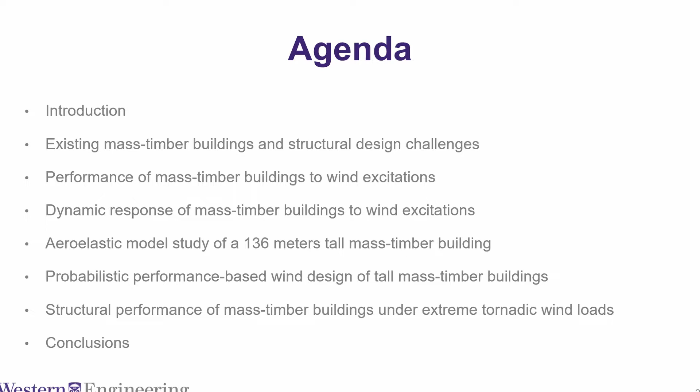We'll focus on the dynamic response. I will also introduce performance-based wind engineering design, the performance-based wind design approach. The majority of houses in North America are made of timber — not necessarily tall buildings, even mid-rise and low-rise buildings — and there's a chance they could be exposed to tornadoes. We have been working on that type of research too, and I will introduce some of the outcomes.

Why do we need wind studies? It's because the majority of our construction is along coastal lines and exposed to hurricanes. Even in the middle of the continent, construction is exposed to intense non-synoptic winds like tornadoes, downbursts, and other strong synoptic winds. We need to design for them, otherwise the kind of damage you see in this picture will happen.

From a tall building perspective, the majority of tall buildings are well engineered, so you may not see damage as significant as in their less-engineered low-rise counterparts. But there is another motivation: the economy.

When you try to design buildings with a blanket approach using building codes and standards, that may or may not accurately represent what you are designing. Chances are you could err towards conservatism. It's not always the case — sometimes you may not even be conservative — but the majority of the time, because we use an envelope approach, we tend to be conservative.

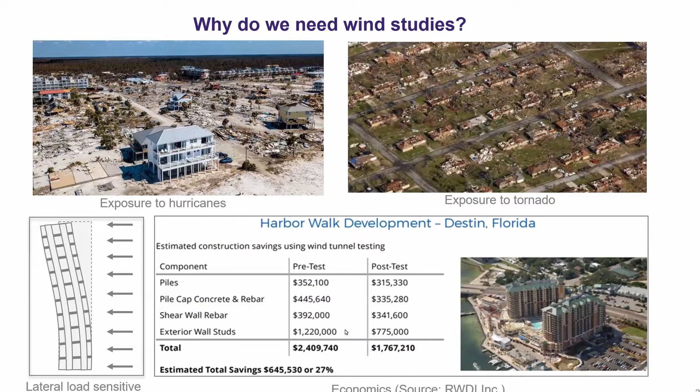For example, on a mid-rise tall building, there was a study done by RWDI. If you design using code versus wind-tunnel-based methods, you'll see savings in cost on this mid-rise type of building — 2.4 million versus 1.7 million. So you'll save about 27% of the cost. There is an economic incentive as well.

Western has a good tradition in wind research.

Sorry, I was closing the door.

Thanks to our former members, like Professor Davenport, who is considered the father of wind engineering, since he established the boundary layer wind tunnel in the early 1960s. Since then, Western has been a place to do wind research, primarily because we have a critical mass of highly experienced wind engineers, professors, research engineers, and more than 60 graduate students, most of them PhD students working on wind-related topics.

We are also blessed with state-of-the-art experimental facilities: boundary layer wind tunnels, a large-scale failure study lab, the Insurance Research Lab for Better Homes, and another lab for avian research, bird aerodynamics and biological aerodynamics.

More recently, during the last decade, we added a state-of-the-art facility, the WindEEE Dome, capable of generating tornadic and synoptic wind. In addition, we augment the experimental research heavily with computational research, using the facilities at the SharcNet supercomputing facility, the computational resources available in the Southern Ontario Smart Computing Innovation Platform, and the cluster we have at WindEEE as well.

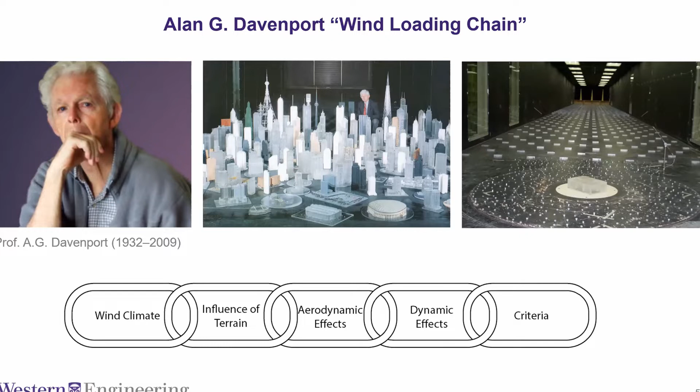It starts with the wind climate. The wind climate, first in the chain, primarily deals with quantifying the design wind speed, and what type of wind is happening in the particular place where we want to design the structure. Is it hurricane? Is it tornado? Is it downburst? What's the frequency?

This kind of information can be obtained, particularly for straight wind, from airports - we analyze the airport data. If the place is remote and there is no airport or measurement data, we rely on climate models. Majority of the time we target the design wind speed based on what the code says, but if there is no local code or if the code is too old, we rely on this kind of airport data.

Of course, in any system design, the outcome or response of the system is dependent on the input you provide. If the input is not correct, there is no way the output will be correct. So this is the most important step in the wind load chain.

Once we know for what intensity and type of wind we are designing, then we look into other parameters that affect the wind response. Wind is affected by whatever it sees - for example, the terrain, the surrounding buildings.

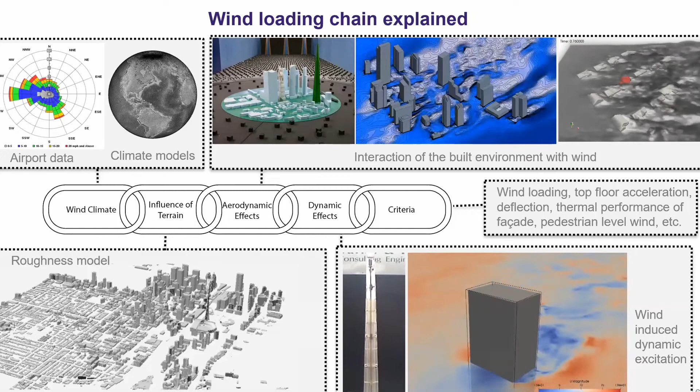If you have antennas, for example, this antenna is on top of a 350-meter tower building. When you have flexible antennas like that, with almost a 30-meter range, you have to study it separately because it's so flexible. You see the dynamic model in the wind tunnel behaves like this - you have buffeting movement, across-wind movement, and things like that. So this load would be different from the same structure if it was rigid.

That is what the dynamic effect emphasizes. If you consider all these parameters, most likely your wind load will be accurate, the deflection you calculate will be accurate, and the acceleration that you calculate from your model will be accurate.

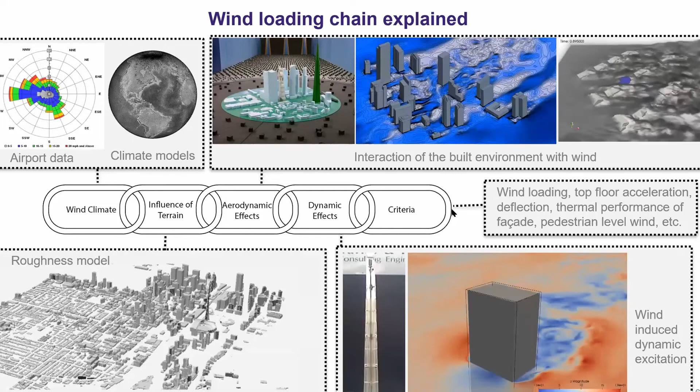Most of the discussion so far was based on straight wind, but as you know, even in South Ontario there is the Northern Tornadoes Project led by Professor Greg Kopp at Western, who chase tornadoes. They counted more than 29 tornadoes in South Ontario this year alone, and in the Midwest United States and North America more than 1,700 tornado landfalls.

So we have to design at least the essential facilities for tornadoes, like hospitals, police stations, fire stations, and at least we should have safe rooms for residentials. In order to do those kinds of designs, we have to determine the tornado load accurately.

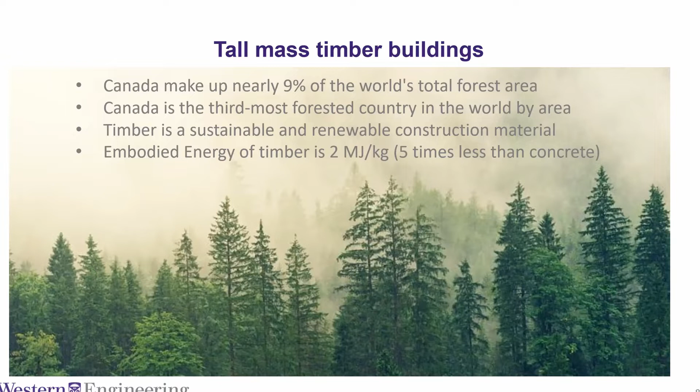With proper forest management, we can do this without affecting the forest - the forest needs to shed some of the old trees anyway. Just by utilizing those kinds of trees, we could build many houses out of timber.

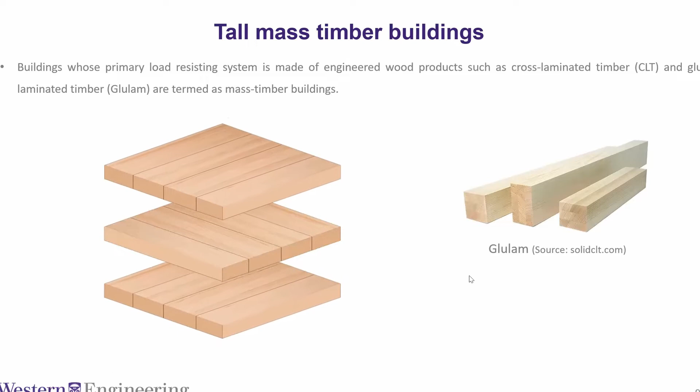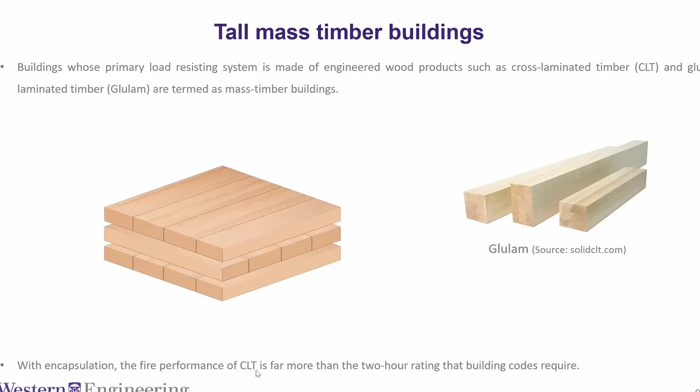Since CLT was invented, the construction of timber buildings is becoming taller and taller thanks to cross-laminated timber products and glulam columns - these can be structural members. With encapsulation - I'm not a fire expert, but my colleagues tell me the fire performance of CLT far exceeds the 2-hour rating that building codes require.

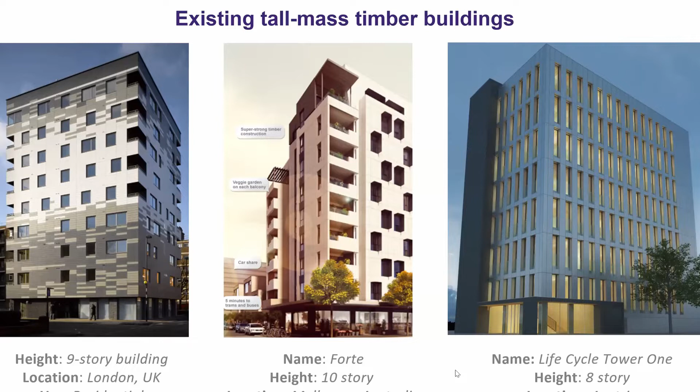Inspired by this, there are mushrooms of tall buildings throughout the world. Some examples are the 9-story building in London, the Forte 10-story building in Melbourne, and the Life Cycle Tower 1 in Austria.

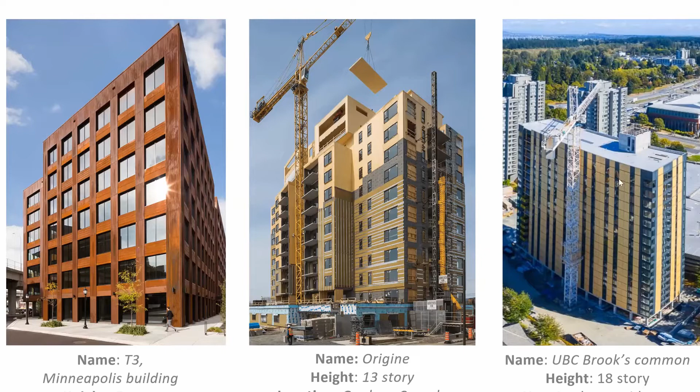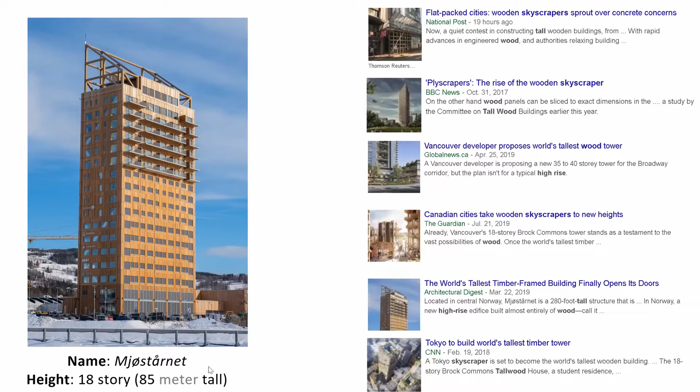There is also one building in Minneapolis, and Origine in Quebec City. One of my PhD students, Samuel, is monitoring this building, so I'll be talking about it. And the UBC Brock Commons student dormitory building, 18 stories, except for the concrete core and the first floor, everything is timber. We'll be talking about this building as well. The tallest is the 18-story building in Norway, which is 85 meters tall, and there are many more in the making.

There are some challenges when you build tall mass timber buildings. Most of Canada, like British Columbia, Ontario, and Quebec, have approved buildings up to 12 stories. I'm sure with engineering design, taller buildings can also be approved. We were working with Sidewalk Labs in Toronto on a 35-story tall mass timber building, just before the cancellation of the program. So the sky is the limit, but we have to acknowledge some of the limitations and address them accordingly.

What are these limitations? Timber has low lateral stiffness and is lightweight in nature, and we need some mass to kill the vibration at the top occupied floors. There is also a higher mode effect that may contribute to the load. Drift under service level wind load is higher, and there is habitability risk due to along and across wind acceleration. The vibration issue has to be looked into.

And like any other building, localized fatigue issues on connections, cladding connections, and things like that have to be looked at. When you design tall mass timber, the global forces in addition to local forces have to be considered because of the lightweight nature of the building. Looking at these issues, we started asking some fundamental research questions. For example, how tall can a mass timber building go without wind-induced vibration issues? And what is the best strategy to assess serviceability and things like that.

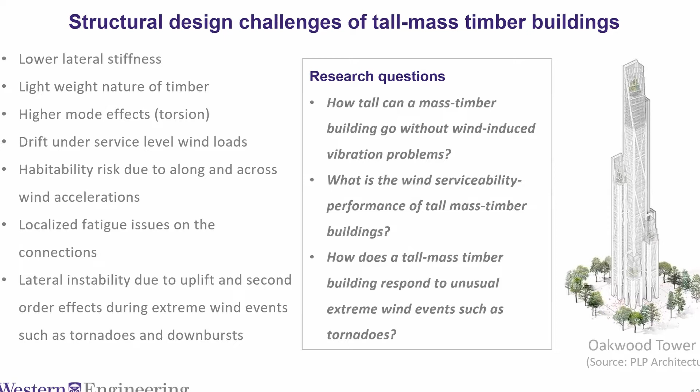We detailed it for 5 different height tall mass timber buildings, as you can see in the figure: 10-story, 15-story, 20-story, 30-story, and 40-story. I will be talking about the performance of this, and at which height we will start noticing the acceleration issue and things like that.

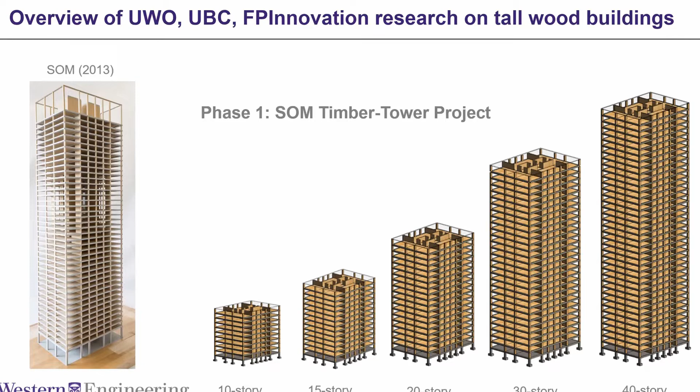The second one is the UBC Brock Commons building. Out of abundant caution, the structural engineers put a concrete core, but as researchers, we said, okay, what will happen if we knock out the concrete and make it fully with CLT, cross-laminated timber. You will see the result of that research: one with reinforced concrete as it is designed and built at UBC, and the other a theoretical model where we knock out the concrete core and replace it with CLT.

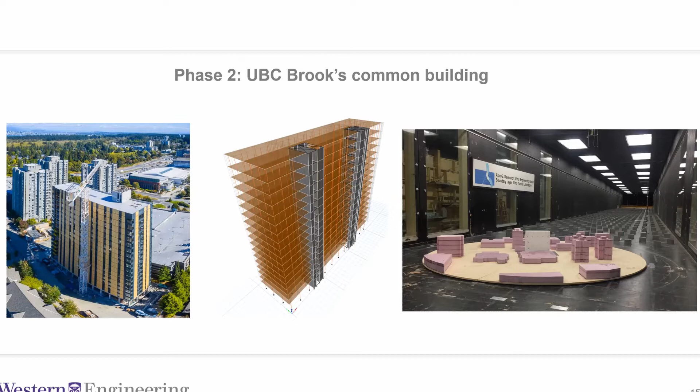And the third example is the shorter building. We did a detailed tornadic investigation as well.

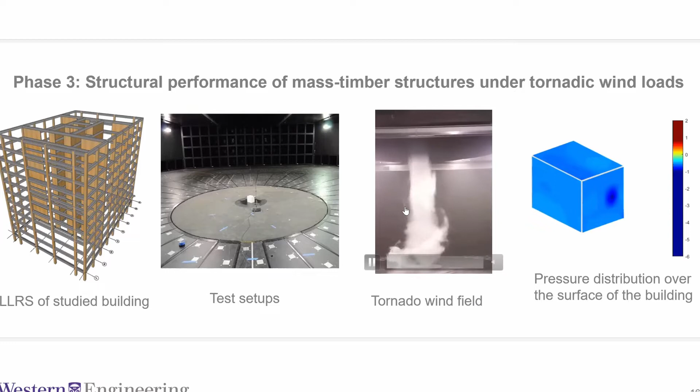Coming back to the first project, as I mentioned earlier, this design was inspired by the preliminary design structural form that was put forward by SOM in the public domain. We took that and completed the design. Basically, it has perimeter concrete beams and link beams that connect the core and the shear wall. Otherwise, all the columns, the floor, and the shear walls are CLT. More than 90% of the structural system is CLT.

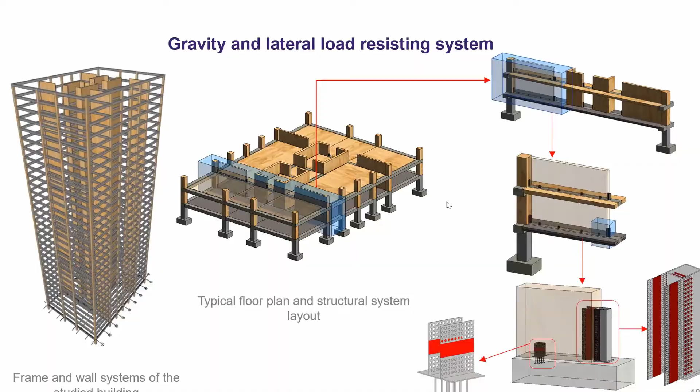One thing we used was the HSK connection. In fact, that detailing is what makes it different from what was proposed by SOM. Once we completed the design following this design process, I will provide the reference for the detailed design guideline. There are a couple of papers that came out of this work. Any interested person can look into those papers.

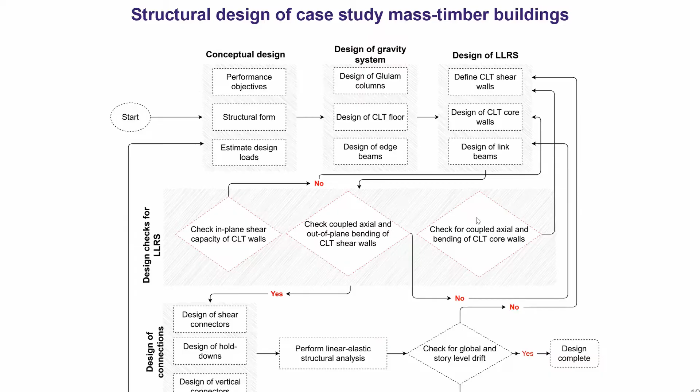If we zoom into the structural property or the dynamic property of the building, I pulled two examples, one for the 40-story and the other for the 10-story. As you can see, the 40-story building, although only 40 stories high, has all the first 5 modes with frequency less than 1 Hertz. Typically, in the majority of tall buildings, it is only the first 3 frequencies that become less than 1 Hertz, unless it's a really unique super tall building like the Chicago Spire or Burj Khalifa or some of the tallest buildings.

But the majority of tall buildings that we see in Toronto, for example, only have the first 3 modes typically excited by wind. A 40-story timber building, however, could have a natural frequency up to the 5th mode with a magnitude less than 1 Hertz. That means the 4th mode and the 5th mode could be excited by wind.

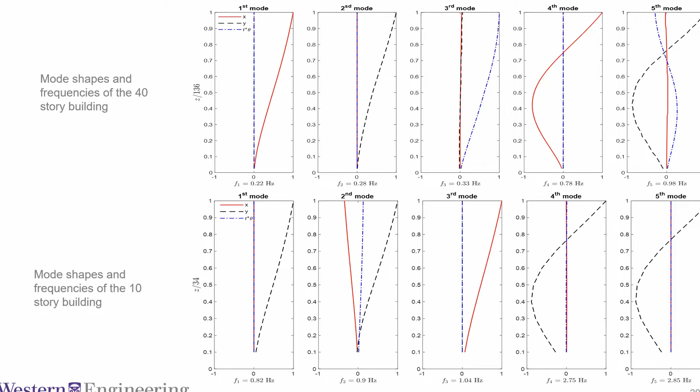Even a 10-story building's first few modes are less than 1 Hertz, so there is a chance it could be excited by wind as well. That's what makes them special - they are flexible, hence we have to deal with that during the design or mitigation process. Okay, these are some of the definitions.

Wind, usually straight wind, has this kind of boundary layer. The blue shows the mean profile and the green profile is instantaneous. Usually if you take one snapshot, you get the green, but if you take multiple and average them, you get the blue profile. It is this type of wind that excites our building.

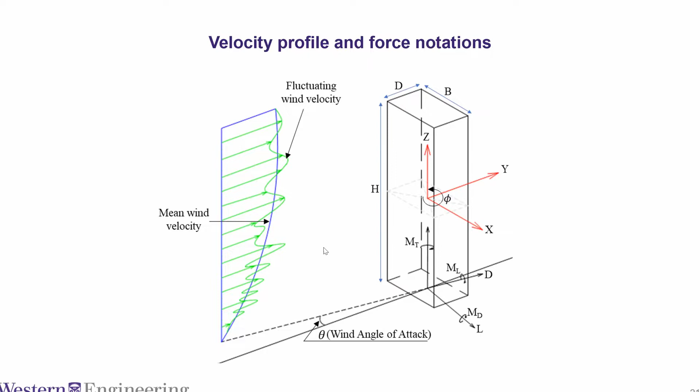Whenever I use axis Z, it is vertical, Y is in the direction of the wind, X is in the across wind direction. You have moment in the X direction, moment in Y, and torsion loads. And the angle of attack - the wind can hit the building at different angles. Usually in the wind tunnel we study 36 different wind directions and design for the worst of those.

It is important also in the design of wind to produce the mean velocity profiles shown by the dark color and the turbulence intensity shown by the red color. In this study we looked into different kinds of exposure: open country, suburban, urban. For example, comparing open and suburban, open has more flat, bigger velocity close to the ground. Suburban has less velocity close to the ground but more fluctuating velocity or turbulence close to the ground. That's the signature of open and suburban.

I'm intentionally explaining this because you'll see the impact on tall mass timber response, and we need to characterize whatever wind simulation we do in the tunnel - it should have similar frequency content to the real wind, because if that frequency content is off, you may or may not excite a tall building. So you need to match that as well.

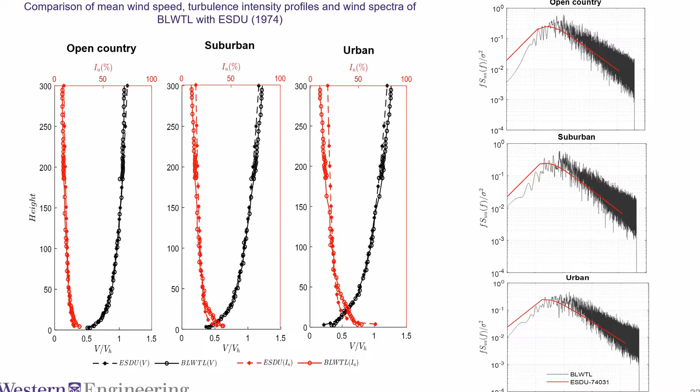Okay, then after matching those, we conducted 5 different tests. Yes, there could be an approximate way to get the other models from one building, but we didn't want to introduce any approximations regarding the ground effect and everything. We wanted it estimated accurately, so we conducted a pressure test for 5 of them.

A pressure test basically looks like the one you see on the bottom right. You have openings, small holes with a diameter of a little less than 2 millimeters. Then at the back you attach it - if you open the model, it looks like this. You attach a tube, and at the end of the tube, one end is the hole on the building, the other end is attached to a pressure transducer.

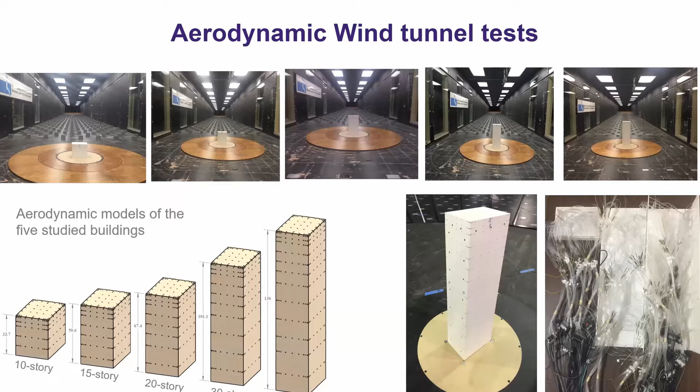Basically it measures the voltage. As the wind puffs inside the wind tunnel, the voltage changes, and we measure those. We've calibrated what kind of voltage change corresponds to what type of pressure, and through that, at all these dot points, we measured the pressure. Once you have the pressure at those points, you multiply it by the tributary area, and you can calculate all kinds of forces you need - shear force, base load, and floor by floor load, whatever you need for your design.

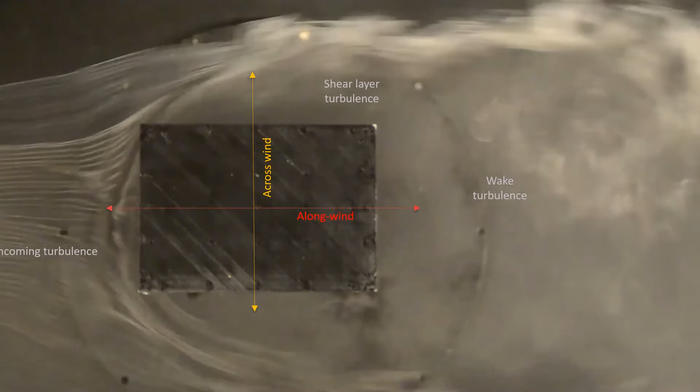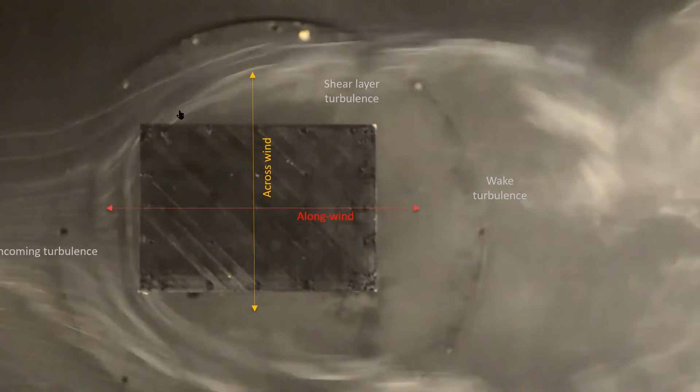Okay, I want to draw your attention to this video. Usually this is what happens - like when we put smoke in the wind tunnel, this is what you visualize, and as you can see there is oncoming turbulence. It is not smooth - you see the change in streamline and the fluctuation and things like that. As it hits the first leading edge, both on the left and the right, or as you see it in your image, bottom and top, you have flow separation, and you have shear layer turbulence added.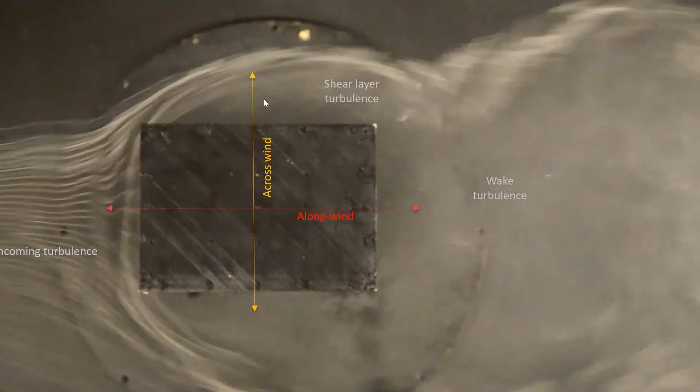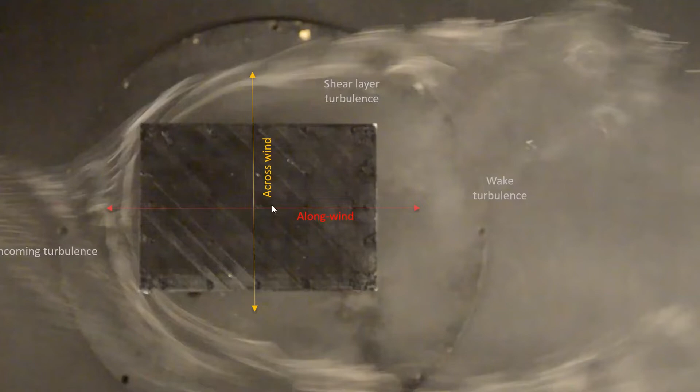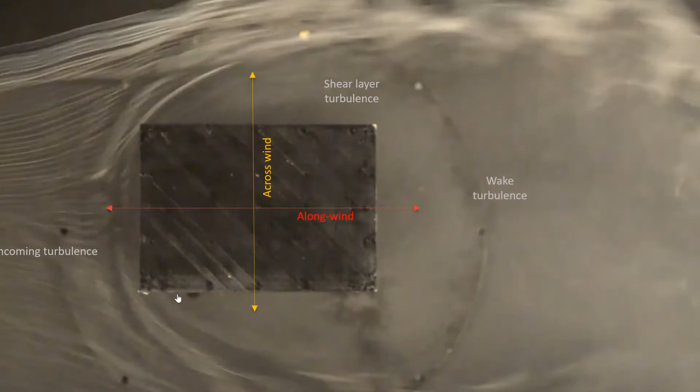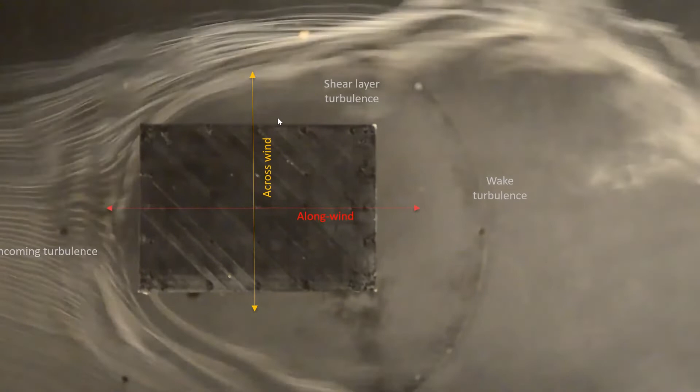Then you have wake turbulence as well. One thing interesting is if the wind is coming from left to right, yes, there will be along wind forces, along wind vibration and things like that. But what is unique in wind engineering is that while the wind is coming from left to right, this vortex sheds at different times from the bottom. This alternate vortex shedding produces a force in the across wind direction and shakes the building in the perpendicular direction. Actually this produces, majority of the time, significant vibration or acceleration, and that's what we have to pay attention to, in addition to the along wind responses.

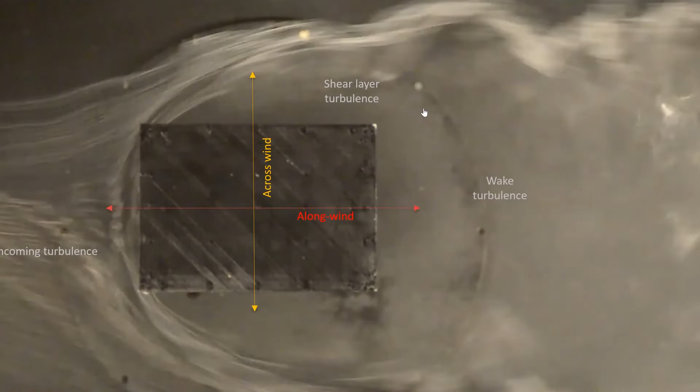In fact, if you look at this, it will show clearly what I was saying. These are spectra of the forces measured at the base, and the first 3 spectra are for a 40-story building using open country exposure - imagine your tall building is in the outskirts of Toronto, for example, or suburban, like in the suburban part of Toronto, and urban if it's in downtown Toronto. When you have those kinds of locations, the responses are different, especially the ones shown by the 3 colors.

Where did I define them? Okay.

Usually they are the torsional and the sway responses. And if you see this, you have for the 40-story building at reduced frequency, natural frequency of the building divided by the velocity at the height of the building times some front dimension.

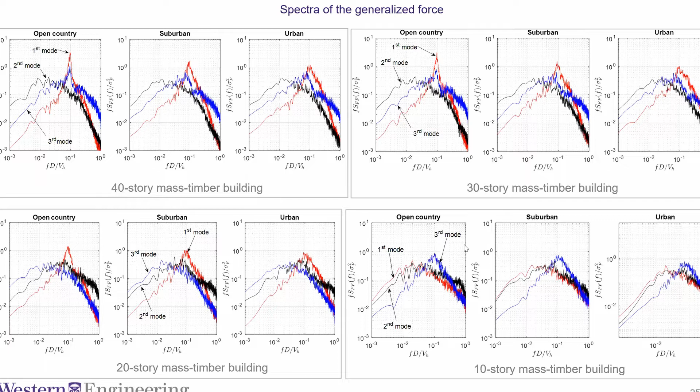Bringing majority of the reduced force just to coincide with the peak response that we see in the spectra, and that could produce issues. So we saw the impact of turbulence, we saw the impact of height. We have to consider all this when we decide to place tall mass-timber building, whether it is in open, suburban, or urban areas.

When you look explicitly at the top floor acceleration, I'll try to walk you through this heavy slide. The first column are responses for a 10-story building, the second for 15, and it goes on, and the last one is for 40. For each building, you have 3 plots: one if the building is located in open country, the other in suburban, and the third row at the bottom is urban.

There are also 2 red lines - these are the serviceability limit states. Like if you have an office building, the NBCC stipulates that the acceleration the building produces on the top occupied floor should not exceed 25 milli-G, milli being 10 to the power of -3, G being gravitational acceleration, which is 10 meters per second squared. If something exceeds 25 for an office building, then it's not acceptable. If something is more than 15 milli-G for a residential building - residential is occupied majority of the time - so the NBCC has stricter regulation of 15 milli-G.

Then if you have a 10-story building in open country, suburban, or urban exposure, you don't have any issue.

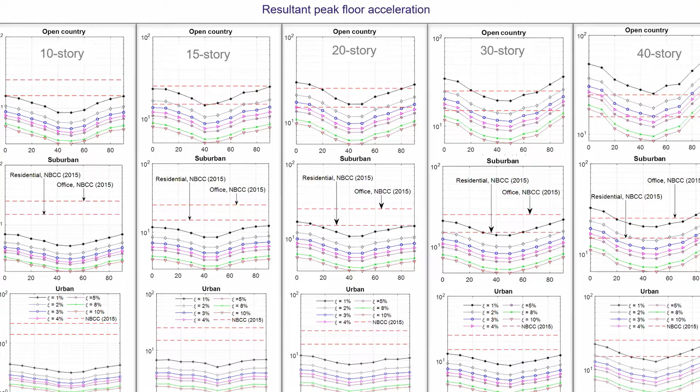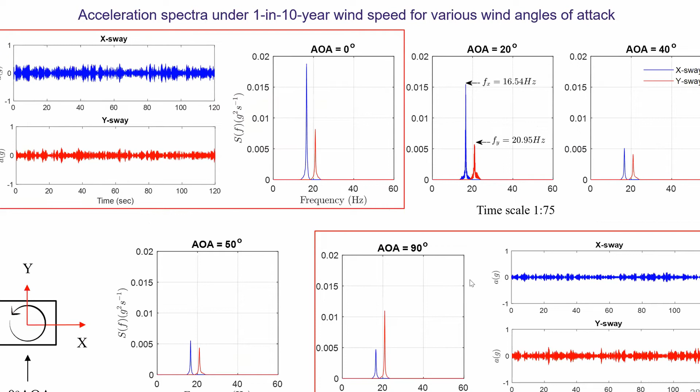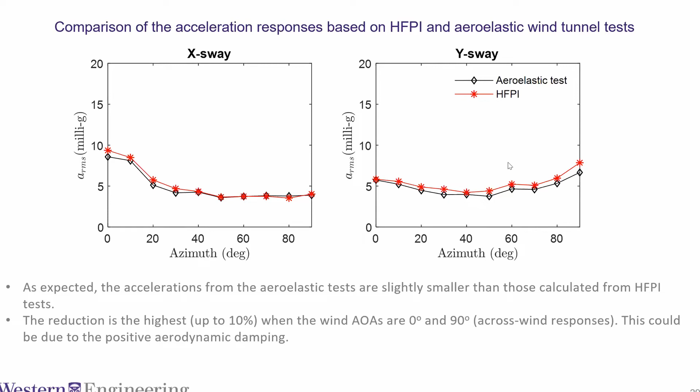I think I will pass this one. This is just a more accurate aeroelastic model to validate the pressure model. And there was good agreement, the error of difference is, majority of the time it is 5%, but it did not exceed 10%. That's the typical difference between aeroelastic and aerodynamic tests. So that's what we wanted to confirm, and we confirmed it.

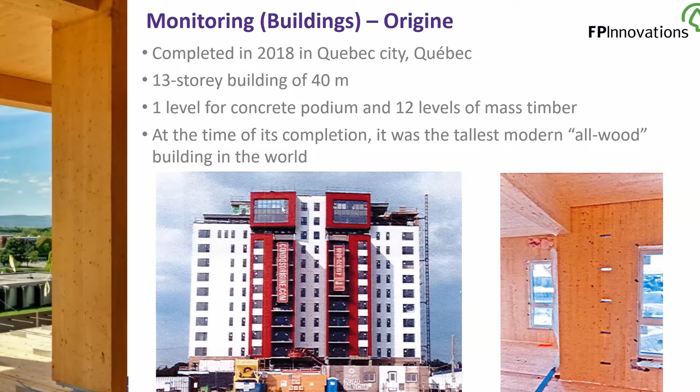As I mentioned earlier, the response, especially the acceleration, is dependent on the stiffness, the mass, and the damping. There's big uncertainty in the damping, and one of my PhD students, who happens also to be an FP Innovations scientist, is a part-time PhD student. He's from the Quebec office in FP Innovations, and he monitors this Origine build. When it was built, it was the tallest all-wood building. Now, of course, the Brock Commons came, and the Norwegian building came taller than this, but it was one of the first all-wood buildings during its construction. Then they have an accelerometer on the top floor, and they were monitoring it, installed underneath the top floor, and this is the preliminary outcome he just provided to me yesterday.

These are the distribution of the damping ratio. If you fit a log normal, it looks like the best fit. And with log normal fit, you are getting 2.5% of inherent damping. This kind of experiment is very useful, because this is the most uncertain parameter. We don't know much about it.

Okay, if you want to know the details about the design in tall buildings and the dynamic analysis, please refer to these papers.

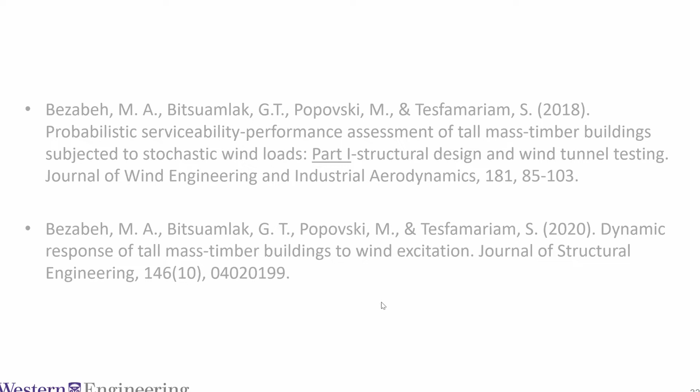Now getting towards the performance-based design. Before I explain the performance-based wind design, I would like to draw your attention to the design of tall buildings as it is done now. Currently, tall buildings are being designed to meet an acceptable level of public safety through some limit state and serviceability, like primarily controlling the top floor acceleration and the top deflection and things like that. And in this type of design, the first significant yielding point is considered an ultimate limit state. So all this elaborate, complex, tall buildings subjected to very dynamic load, at the end of the day, they are designed as linear and elastic design, period.

We never design, at least as far as I know, as nonlinear design, so non-elastic. We never cross the first yield point. And also the uncertainties that are inherent in the damping ratio, in the wind - actually, the most significant uncertainty comes in quantifying the wind itself, the design wind speed, inherent there. And there are all parameters in the structural property. For example, when you start using new construction materials like timber, very complex material, then there are uncertainties, and majority of them, the uncertainty in the traditional design process, is through safety coefficient, and it doesn't lend itself to be modified or followed when you have new construction material or new design method. Then there should be a better way of uncertainty propagation. This, too, the desire to utilize the nonlinear capacity of the material strengths, and the desire to be using new construction material, is pushing us towards performance-based design.

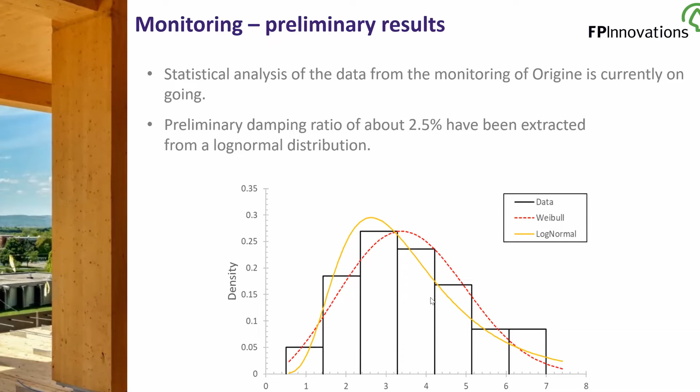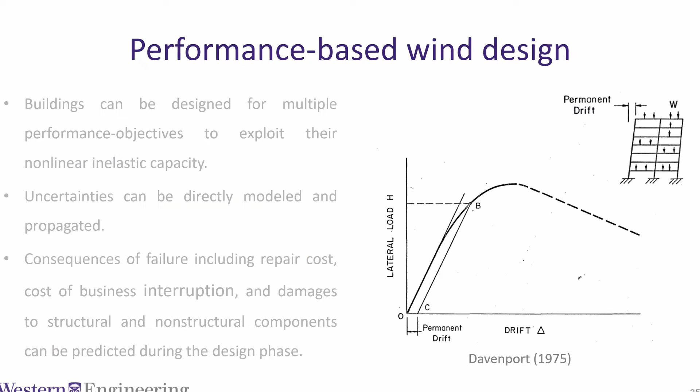The strength capacity of the material will also be represented by a distribution. Then you conduct a Monte Carlo simulation, and the outcome will be represented as probability of failure, as opposed to one magnitude exceeding a threshold. That approach, where you propagate the uncertainty throughout the design process and present the final outcome as a probability of failure, could be more representative of the design process and the performance of the building.

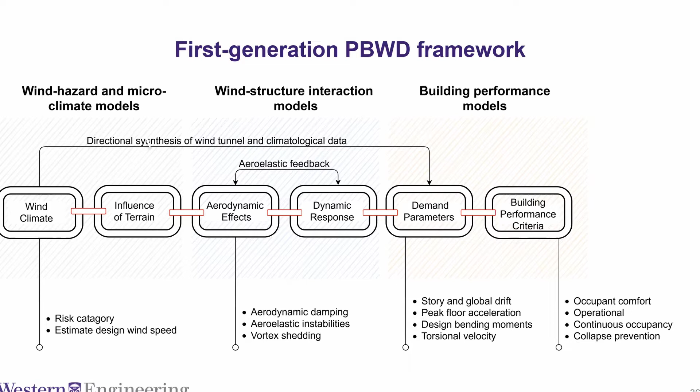That is where things are going. Actually, there is a pre-standard in performance-based wind engineering released by ASCE. It's a matter of time before the majority of design starts following performance-based wind design. Earthquake engineering is a little more advanced in performance design, and the fire community is also following that type of procedure. Due to complexity, we were slow to kick off, but now many researchers are working on this, including the group at Western.

For the 30-story building, we did a probabilistic performance evaluation where we identified 14 parameters and represented them with appropriate distributions as suggested by other researchers in the literature.

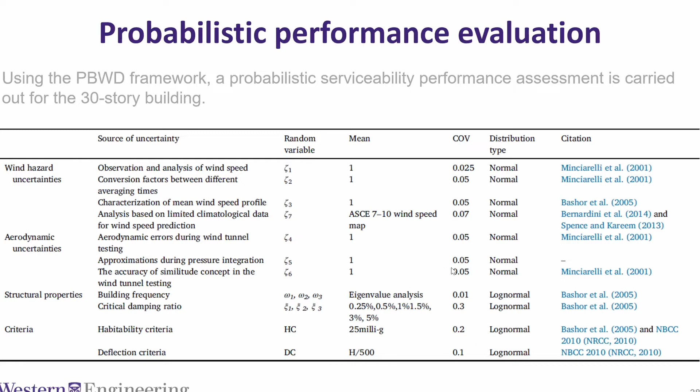We followed two limit states based on habitability criteria: the 15 milli-G criterion for residential buildings and the 25 milli-G criterion for office buildings according to NBCC. Those are habitability criteria; of course there are also criteria that boundary layer wind tunnel labs, RWDI, and the International Standard Organization use, so whatever is acceptable to your design office you can use. There are also deflection criteria like H/500.

Then those are the limit states. We use this combined probability distribution and integrate them to get the probability of failure. So, as opposed to having a single line telling you whether you pass a threshold or not, now you could provide full probability of failure.

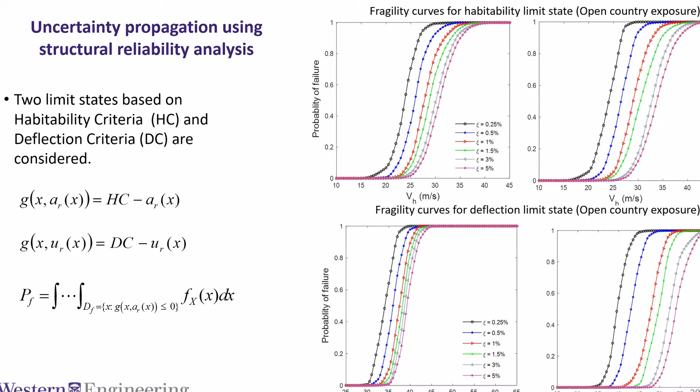You could run a Monte Carlo simulation with, for example, damping ratio of 5% as a mean or 3% as a mean with a log normal distribution, and keep running it for different damping ratios to get the probability of failure—first for habitability limits, then for deflection. This information is useful for the designer and developer: once they decide what level of failure they're willing to absorb, they can check for your design velocity whether you are satisfying the probability of failure for different damping ratios. This is more comprehensive and gives more information than a typical deterministic analysis.

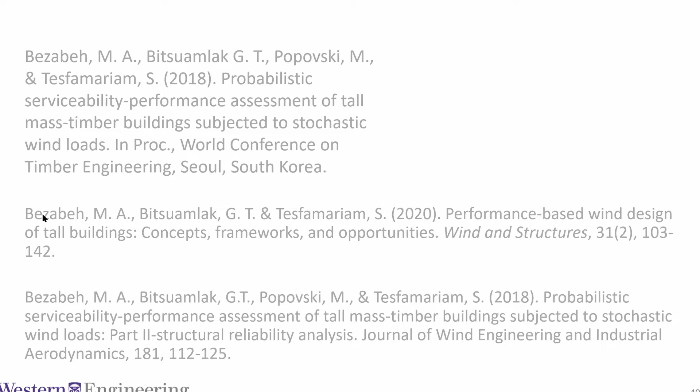Again, there's a beautiful review paper that Matiyas Bezabeh wrote, and I encourage whoever is interested to read it. For his work, Matiyas received the Best Scientist Award during the 2018 World Conference on Timber Engineering. There's also a paper if you're interested in the reliability analysis.

Moving to the second project: a simple question was raised among us—do we really need that concrete core, or could we have gone with only a timber core? We designed the structure again with a concrete core, since we didn't have access to the original design, and matched whatever we saw in the literature in terms of period. For example, Fast + Epps, the structural engineer of record, reported these periods, and what we got was close enough, so we were happy and stopped there.

Then we replaced the concrete core with a timber core and redesigned it. As you can see, the periods are higher, or the frequencies will be smaller. In wind engineering, we like to talk in terms of frequency, not period.

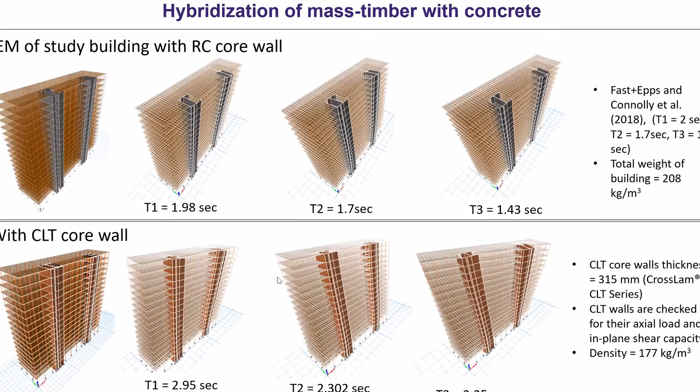Barely satisfied it. Actually, this building was lucky because the significant wind is coming from east, but because of the significant buildings in the east direction, it was sheltering it, and that reduced the impact. Otherwise, for this weak wind, we were getting almost 50 milli-G for the timber core. But on this side, because of the sheltering, you don't see the peak. So that confirms what I was saying: surrounding conditions are important in addition to the signature or the aerodynamic shape of the building.

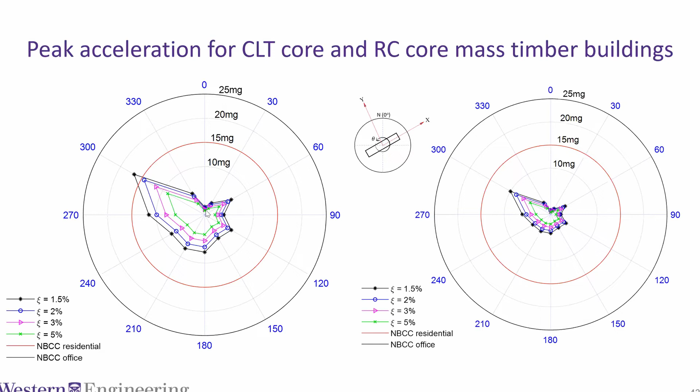But in any case, for this building, even if you use CLT core, it would have satisfied the serviceability criteria. By the way, the ultimate state for strength is satisfied by all designs that we are discussing, okay? It is the serviceability that is governing here.

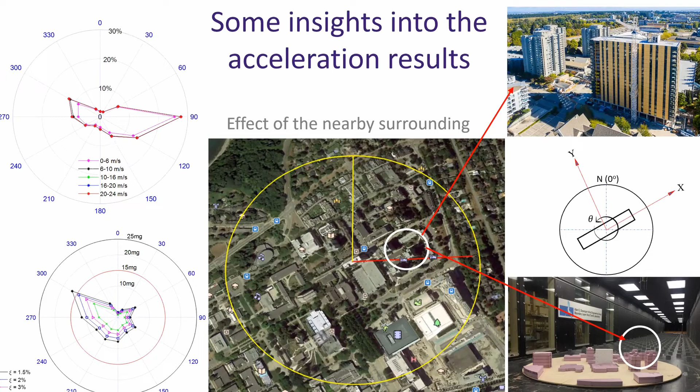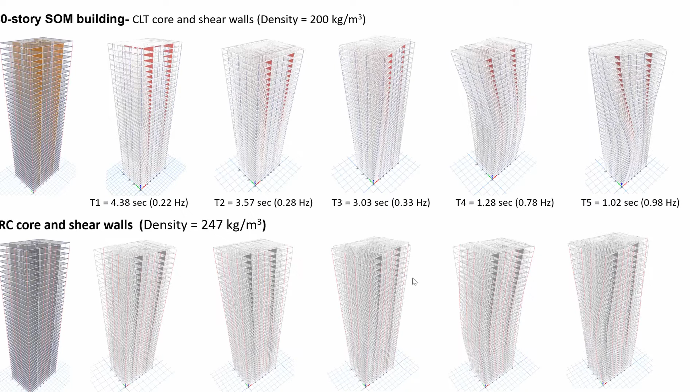Okay, on the 40-story, we did also a similar exercise. And instead of the concrete, the timber core this time - because we saw it has issues, we replaced it with concrete core. And the moment you replace it with concrete core, I couldn't see the numbers, they were hidden here. As you can see...

The fourth and fifth mode with concrete core, they were above 1 Hertz now. For timber, they were below 1 Hertz. So we don't need to incorporate these modes in the wind analysis.

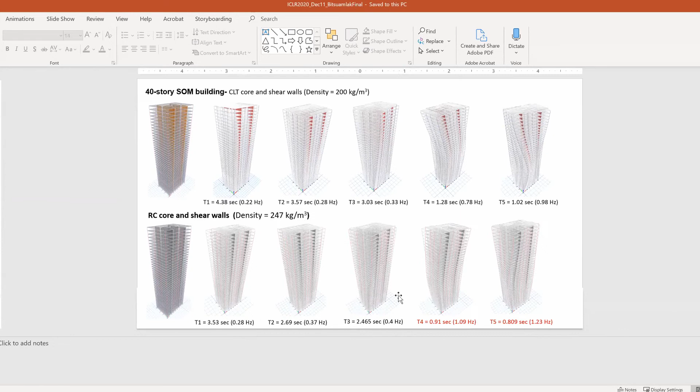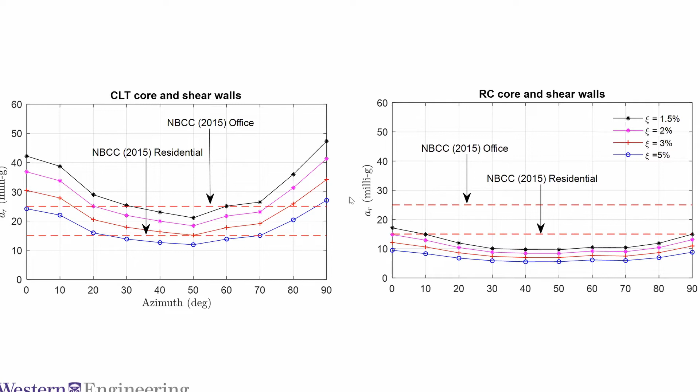Okay, then when you use RC core with a damping ratio of 2%, you satisfy both the residential and the office criteria. Earlier, with a timber core, we have seen we were not satisfying those criteria. So hybridization is a good solution.

Yes, as I already said, hybridization is a good solution, and there are also other solutions - one is aerodynamic. Maybe I will start, since I was already talking about structural mitigation. Let me finish the hybridization concept first. I used to work in Miami, and I have seen firsthand how well palm trees withstand hurricane force.

When the hurricane hits them, they bend too much, and the mass flips it back to its original position. The wind bends it, and the mass brings it back because the mass wants to retain its original position. Then, if you have a heavy mass, a lump mass like this, it's a good acceleration solution. Yes, in terms of other issues you have to watch out, but for accelerations, it's a good solution.

This is what the Norwegian engineers who designed this building used also. Although this timber building is entirely made of timber, just to add additional weight, the last 6 floors were made of concrete, to have heavy mass at the top, similar to the palm tree concept. That was very neat. So you can do this kind of structural hybridization mitigation. The other solution is aerodynamic mitigation.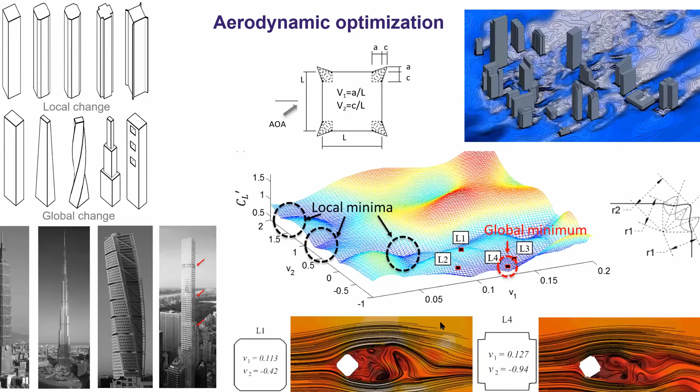Actually, we used this recently when we were advising the PMX 35 Sidewalk Lab project. We were exploring different kinds of combinations. For example, if one introduced balconies on the side to give this kind of corner details, then the red would reduce to the black. Or in terms of pressure distribution, these are the original sections on the left, and on the right are the mitigated versions. You see it kills the load, and the lift vibration responses as well.

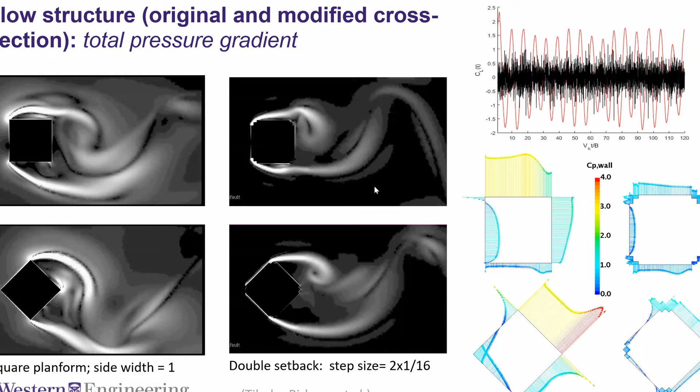Actually, all this is coming as part of a chapter in the Advanced Analysis and Testing of Systems for Design handbook by FP Innovation. And as I said earlier, we tried it on PMX 35, but unfortunately, as you all know, that program got cancelled last year.

Okay, I know I'm almost running out of time. My last 2 or 3 slides pertain to tornadic load.

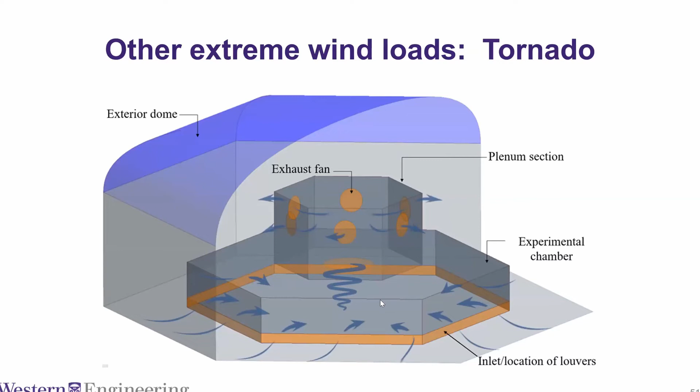Usually at WindEEE, the way we generate tornado, we have this kind of system. You see, you have a hexagonal dome inside and a hexagonal structure, which I show partially on the outside. Whenever you see the orange color, it's the location of the wind fans. Then you can inject wind, either sucking it through the exhaust fans or injecting wind through the base fans in an oblique direction, and that produces circulation. Through the exhaust fan, if you suck it, you generate a tornado. The tornado structure - remember when I showed you the velocity profile earlier for straight wind - it starts from 0 on the ground and parabolically increases until it becomes constant.

But for tornado, it is this kind of belly type of profile, totally different compared to straight wind. Obviously the response it produces will be totally different as well. The load distribution and load intensity dictate what kind of stress or response is going to be produced.

It is also characterized by deep suction, deep or high atmospheric, negative atmospheric pressures. If you see the typical atmospheric pressure at the core of the tornado, it is very deep. So these are some of the characteristics.

If you see this tangential velocity, which peaks close to the ground, it varies from the core, as shown with the red line here. It increases up to what's called the core radius, where you get the maximum velocity. After that, it reduces.

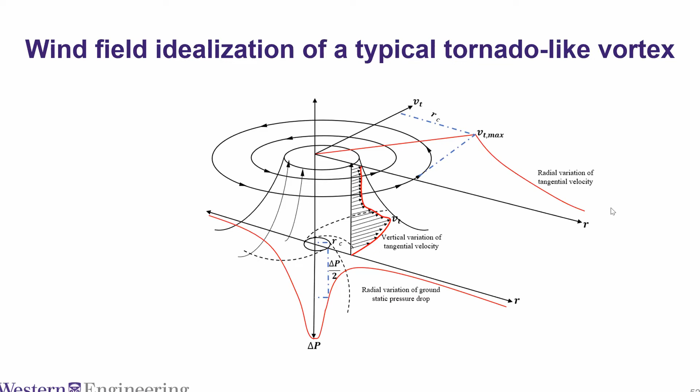So we conducted two types of tests. One, what we call stationary tornado, where we located the building at what we thought was the core radius, or where the tangential velocity is maximum. We did this kind of testing on a 10-story tall timber building.

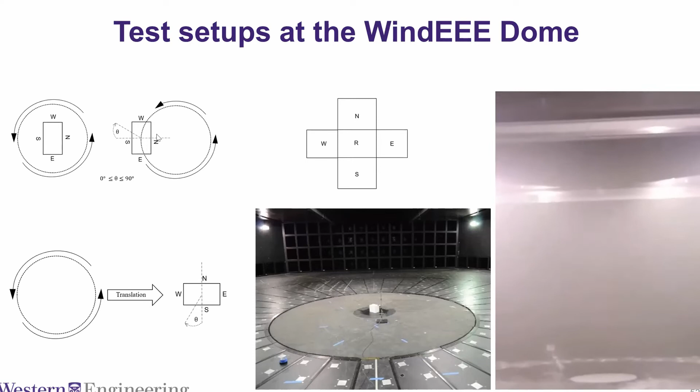The second, we located the building and translated the tornado over it, testing for different orientations of the building as defined by theta. Even for the stationary case, we conducted multiple tests by rotating the building. The tornado translates like this: first with theta 0, next theta 30, theta 60, theta 90. That way the tornado passes in different orientations relative to the building, producing different kinds of force.

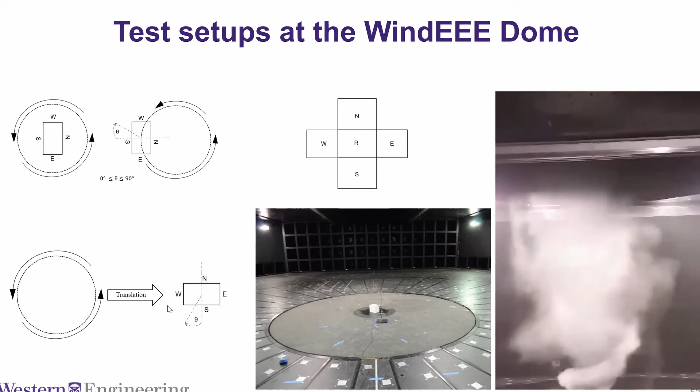Then we designed the building with a Toronto design wind speed with a safety factor of 1.4, and compared it with EF0, EF1, EF2, EF3, EF4, EF5 tornadoes with different levels of damping. Usually I don't like picking a specific damping; I like to give different results for different damping. Then it's up to the structural engineer, who has a better picture of the damping ratio, to pick and use the one that resembles their damping ratio.

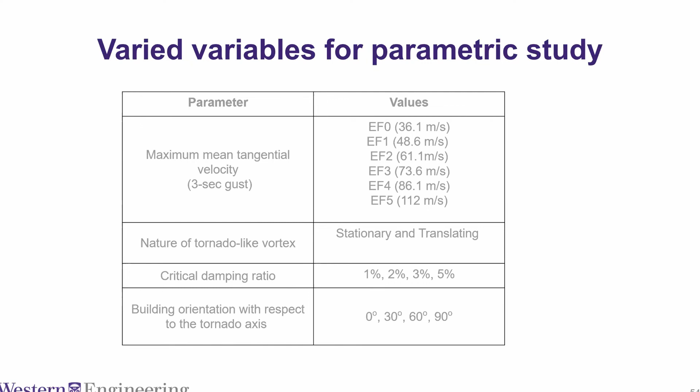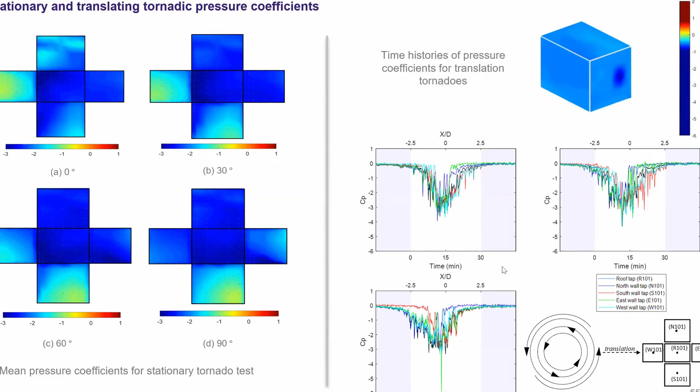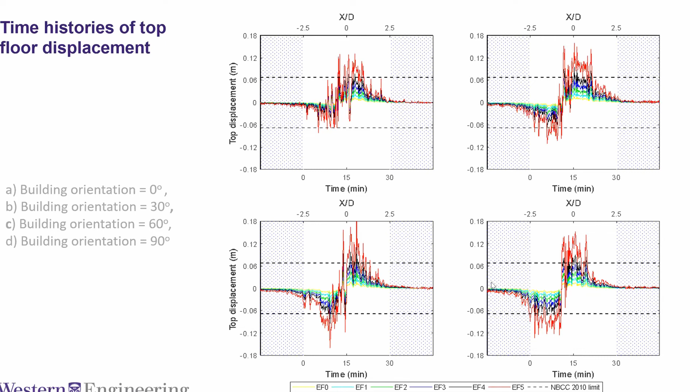Then we calculated the deflection using the time history load that we get from the load. These are the deflections, the top displacement. And if you see, this is the maximum interstory drift at the top.

A is for 0-degree orientation, 30-degree, 60-degree, and 90-degree orientation. If you see, for example, for 90-degree orientation, the building that is detailed with NBCC for Toronto wind speed is okay for EF0 and EF1, but EF2, 3, 4, 5 exceed this. So when you have these types of tall timber buildings in the Midwest or in tornadic regions, you have to check this.

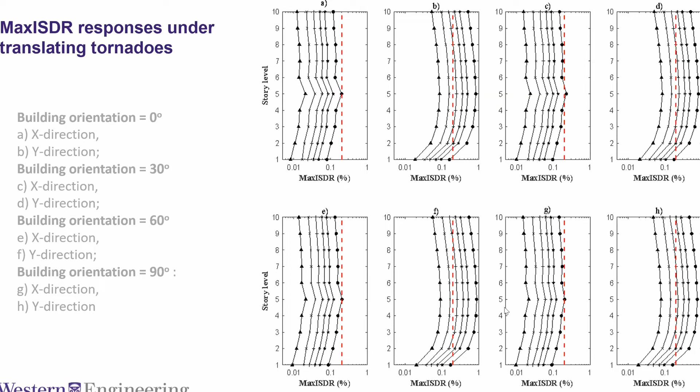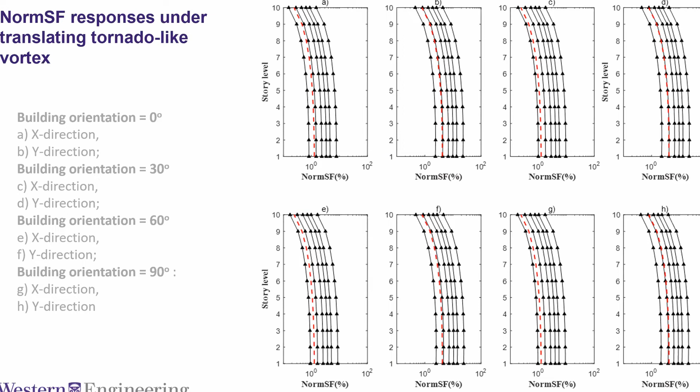The beauty of mass timber is that it is so constructible - it is lightweight, you can fabricate it somewhere and bring it. But when you combine it with concrete, you lose that advantage. So carefully, you can hybridize it innovatively with manufacturable construction materials, and engage aerodynamic and dynamic optimization.

Honestly, at this time and age, with significant computational resources and methods, efficient numerical algorithm design should be optimal as opposed to typical design. With the computational resources we have, we can scale this into a neighborhood design level, risk at a city level, and using digital twin techniques, bring our buildings and cities into the virtual world, doing our computational process assisted with artificial intelligence.